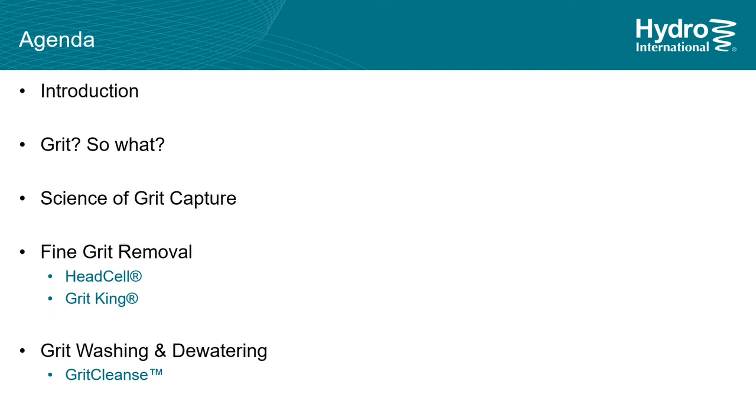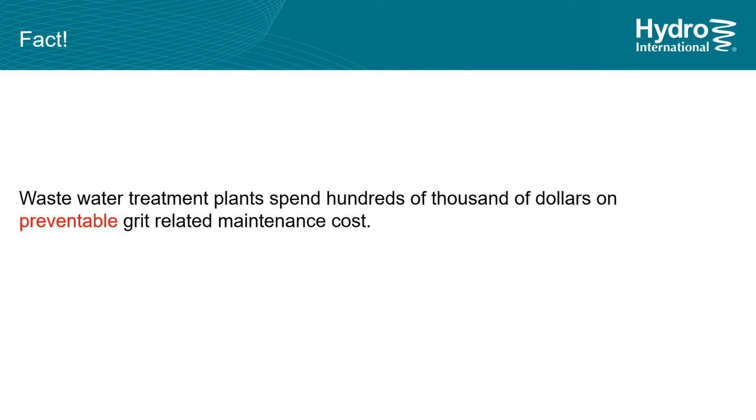Did you know that wastewater treatment plants spend hundreds of thousands of dollars on preventable grit-related maintenance costs? Preventable is the operative word here, which means that grit removal, when applied correctly, can help you save hundreds of thousands of dollars.

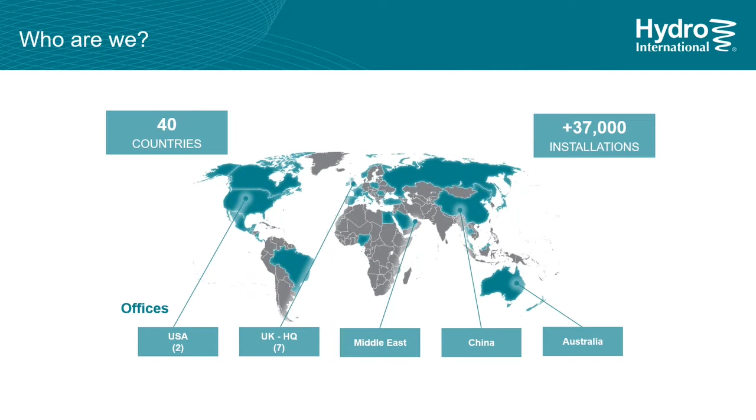Hydro International is a solutions provider for a variety of water and wastewater applications. We are headquartered in the UK with offices in the US, Middle East, China, and Australia. We have a network of distributors and partners all around the world that help us reach customers in over 40 countries. We have over 37,000 installations worldwide, and we have been in operation since the 1970s.

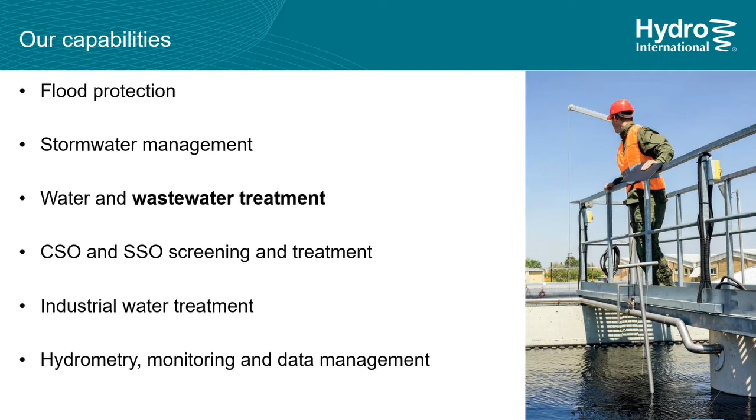As a company, we operate in various sectors, but today we will focus on grit removal from municipal wastewater. Hydro International is the market leader and pioneer of many grit removal technologies since the 1970s. We offer proven technologies and have featured in academic literature like Wastewater Engineering by Metcalf and Eddy.

We have also worked with universities around the world by performing in-field testing and proving the efficacy of our solutions. We have our own test labs in the US and UK in which we test and verify our research during product development.

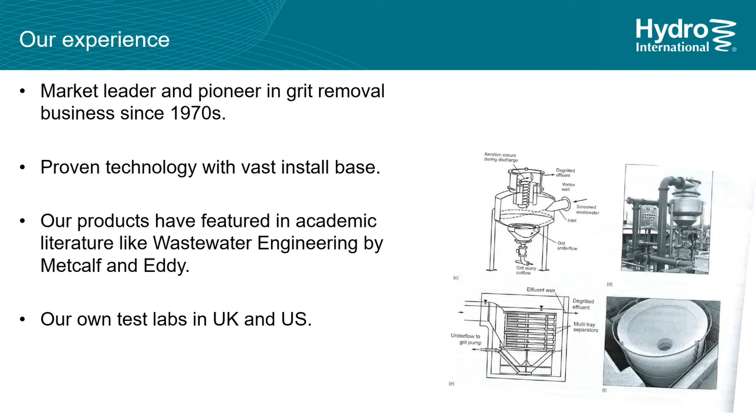Let's talk about grit and why it is a problem. Well, grit is a nuisance material. Anyone who has been to the beach can attest to that, right? And it is no different for wastewater treatment plants. It adds no value to any part of the treatment process. It is undesirable and it gets everywhere.

Literally everywhere. Wastewater treatment plants are significantly impacted by grit. It causes abrasive wear to mechanical equipment, increasing maintenance and operational costs. And it accumulates in processes throughout the plant, reducing processing capacity and efficiency over time. And once grit is spread around the plant, it is an expensive problem to fix.

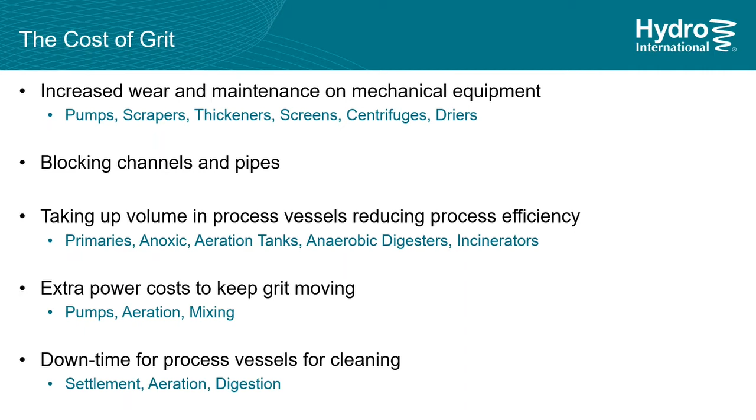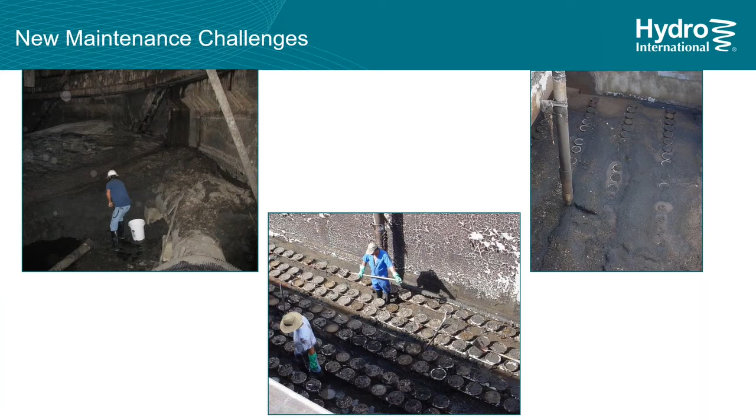Grit accumulation comes with several new maintenance challenges. You must take the process and vessel offline and send someone in there to clean it, often manually. This costs time and money.

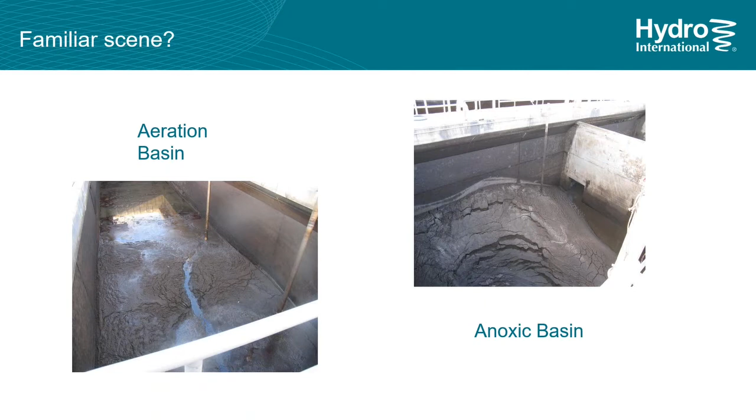It is important to note that all these pictures from different plants did have some form of grit removal system, and yet grit made its way into the plant.

Our research says that most operators have a grit problem, but they don't do anything about it. The assumption is that grit removal systems were installed, but the grit still made its way into the plant, so it is inevitable, there is nothing we can do about it. This is an incorrect assumption. The problem is preventable. We just need a system that works.

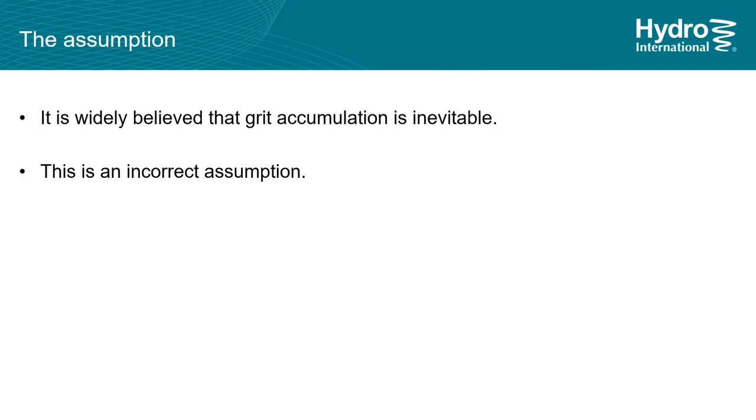The pictures that you just saw were a result of less than 50% removal of total grit that enters the plant. The solution is a system that removes the bulk of the total grit load.

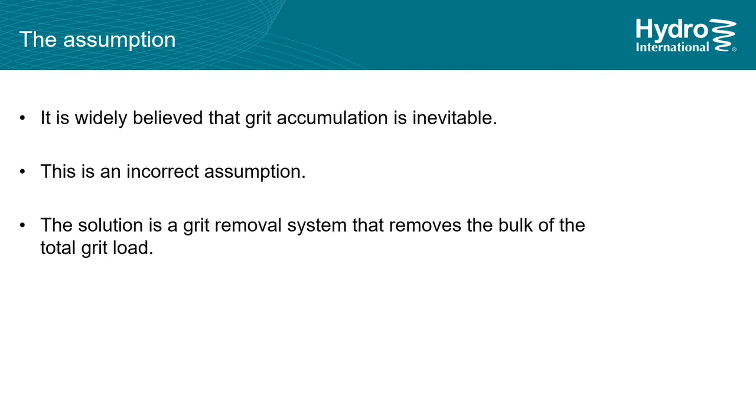We know that grit affects all areas of a treatment plant. Let's look at some figures.

In our research, we have estimated that potential maintenance costs due to grit is around $9.2 per 1,000 cubic meters of wastewater. Now granted, in your specific market, it may cost less to clean an aeration tank, but it might cost more to replace the pump. On average, this figure is representative.

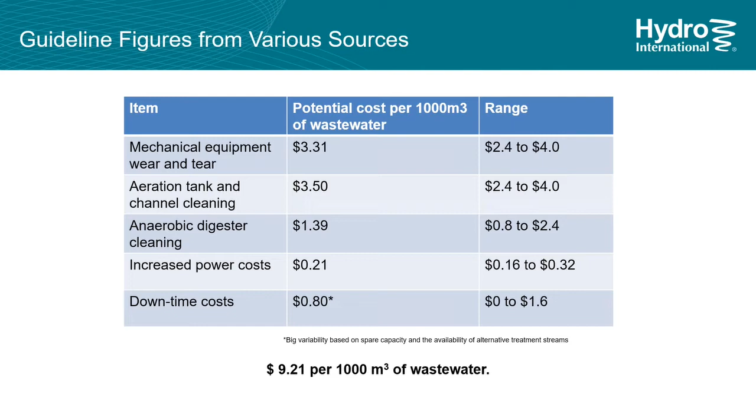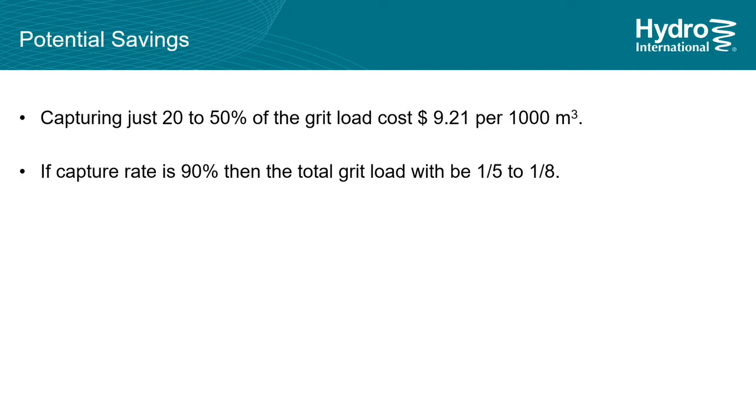That's $9.2 when we're targeting only 50% of the grit load. If we capture 90% of the total grit that's entering the plant, it will reduce the grit load to a fifth or an eighth, which will also reduce the grit impact cost to $1.8 as compared to $9.2. This might just save you up to $8 per 1,000 cubic meters of water. Clearly, there is an advantage in removing more grit at headworks.

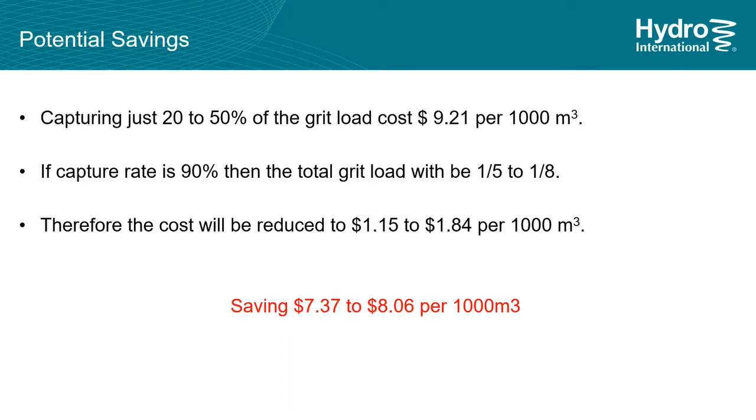Let's look at an example. We've collected this cost data from conferences, research papers, and from plant owners around the world. This is an insight as to how much money was spent fixing problems arising due to grit. We turn the cost into cost per volume of water treated by taking into account the average flows of various plants.

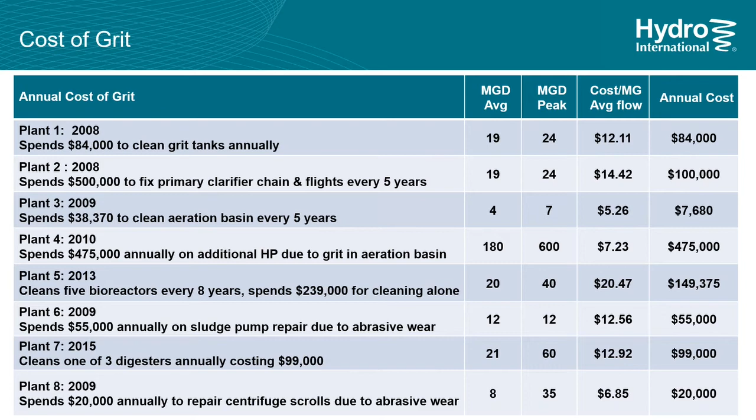As you can see from examples, plant number 2 paid $500,000 to clean up and fix their primaries. Plant number 5 spent close to $250,000 to clean bioreactors every 8 years. This is just a summary of areas that our analysis covers.

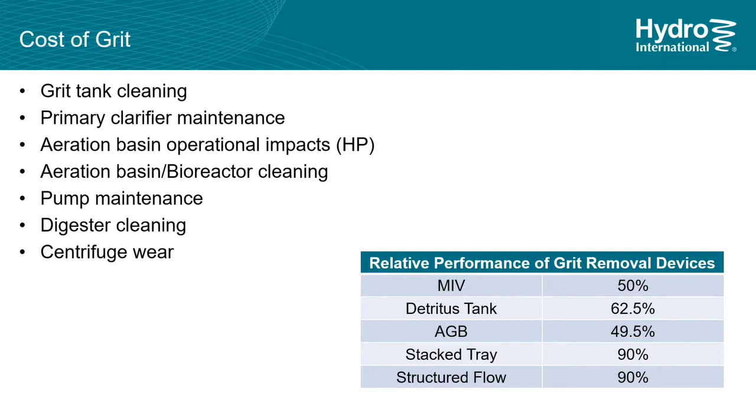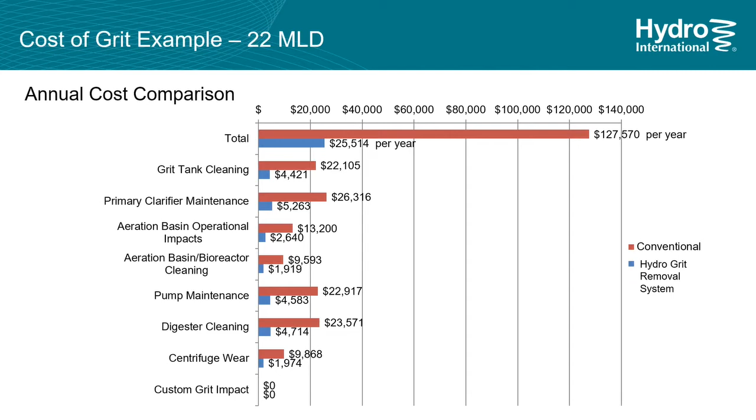We use the removal efficiency for the various technologies based on relative performance data. From that data, we created a total cost comparison for a 22 MLD plant. And also listed here is individual cost of grit for different areas in an STP.

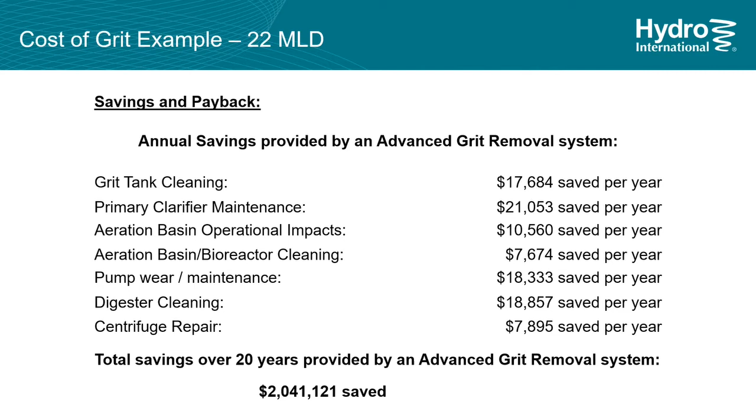If you take the difference, this slide shows that Hydro can potentially help you save over $100,000 per year in maintenance cost in a 22 MLD plant STP. It is important to mention here that it's not just the maintenance, but also operational costs that we help save. For example, our analysis shows that we can help save $10,000 per year in just energy consumption by reducing grit load on aeration basins.

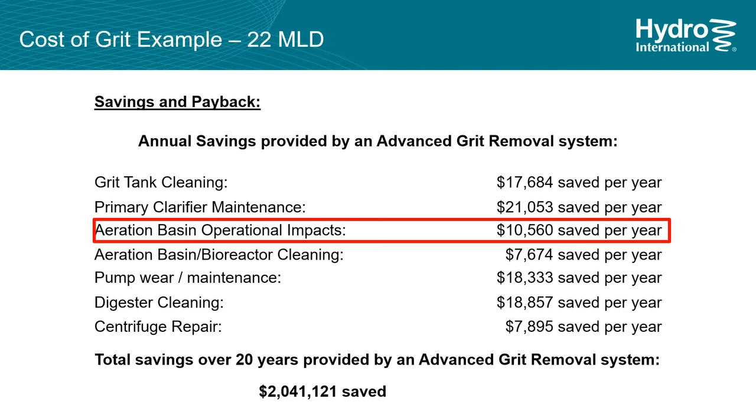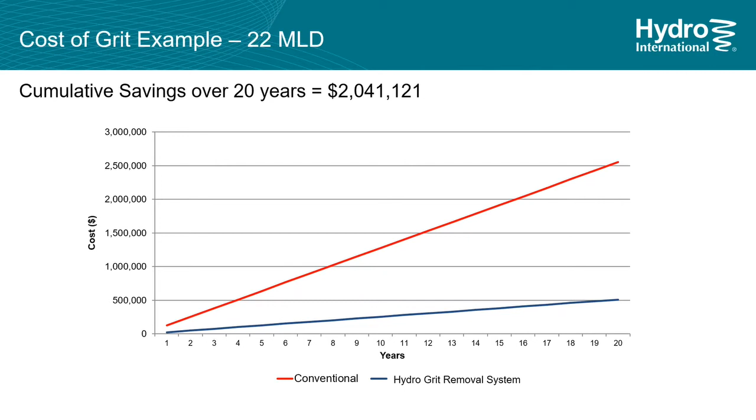In our estimates for a 22 MLD STP, Hydro can potentially help you save over $2 million over a 20-year period. And the savings in 5 years, which is equal to $512,000, could cover the cost of a new advanced grit system for a 22 MLD plant. In other words, the system pays for itself in 5 years.

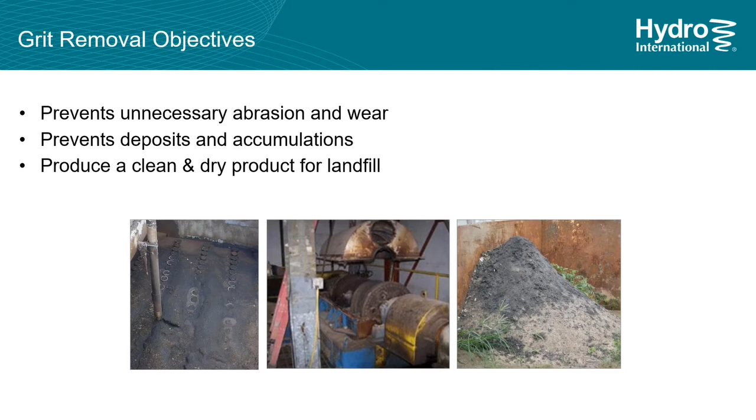So grit removal is important. Our objectives in removing grit are to prevent abrasive wear on mechanical equipment such as pumps and centrifuges. Preventing grit deposits in aeration basins, digesters, and piping is also another objective. All this would save significant sums of money.

Let's talk about why almost half of the total grit makes its way into the treatment plant and is not captured by conventional grit removal systems. All grit removal systems are sized based on settling velocity of grit. Settling velocity varies based on size, shape, density, etc.

A major reason that conventional grit removal systems do not work is a lack of understanding of how municipal grit actually behaves. Since grit is not well understood, it is often erroneously treated as clean sand particles. This is a major reason why most grit removal systems fail to capture the quantity and sizes of grit they are designed for. Understanding the actual characteristics of grit at a particular location helps determine the sizes and types of grit removal system that is needed to remove it.

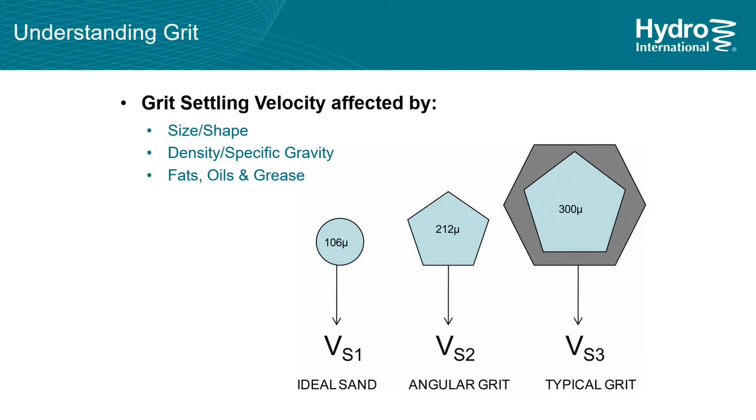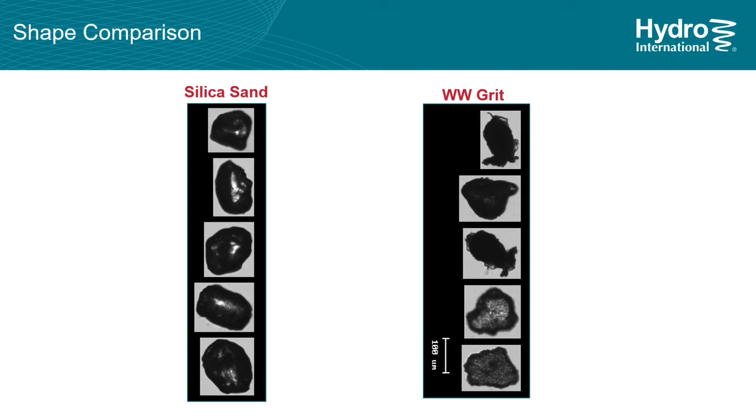Here are some magnified pictures of pure silica sand on the left and municipal grit at the right. As you can see, silica sand has well-defined geometry, whereas wastewater grit, wrapped in fats, oil, grease, and organics, has irregular shape. Therefore, it has irregular densities, and therefore, it would have different settling velocities compared to pure silica sand. The fact is that wastewater grit is very different to an ideal silica sand.

An easy analogy would be that of falling rain versus falling snow. Furthermore, most grit is smaller and lighter than the standard against which conventional equipment is designed.

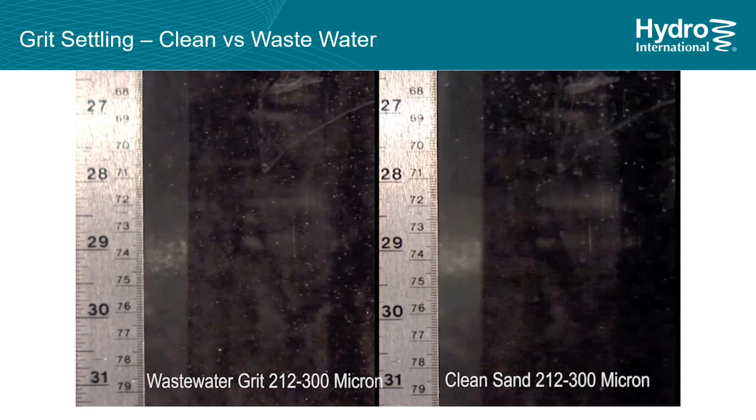As we saw, there are variations in types of grit. Municipal grit is not just a clean 200 micron spherical silica sand. Systems also have to deal with non-uniform particles, varying sizes, and addition of biomass. Variation in grit causes variation in settling velocities. With attached biomass, larger grit particles settle at slower rates.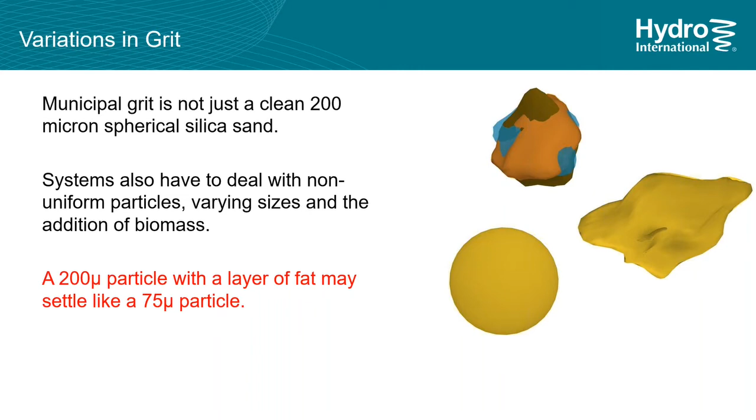A 200 micron particle with a layer of fat may settle like a 75 micron particle. So if a system is sized for a 200 micron clean grit, it might not even capture a 200 micron municipal grit, at least not the bulk of it. Another problem when sizing to remove 200 micron grit is that sometimes that is not enough.

This is a compiled particle size distribution curve of the grit from 18 different plants in the US. In almost all of them, you will find that sizing to remove 200 micron grit particles will only remove 50% of the total grit load.

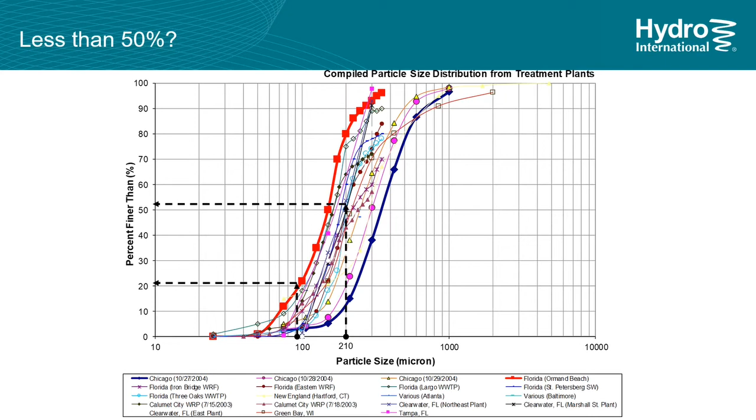If we modify our design criteria to remove 90% of the total of the incoming grit, then we need to change our design cut point to somewhere between 70 to 150 micron, depending on the endemic grit gradation.

This is the grit distribution curve of a grit that was found in the aeration tanks in a plant in the US. This was downstream of a mechanically induced vortex grit removal system, and this still had a lot of grit. Almost 45% was 300 micron, which that technology said it would remove 95% of. Obviously, that did not happen.

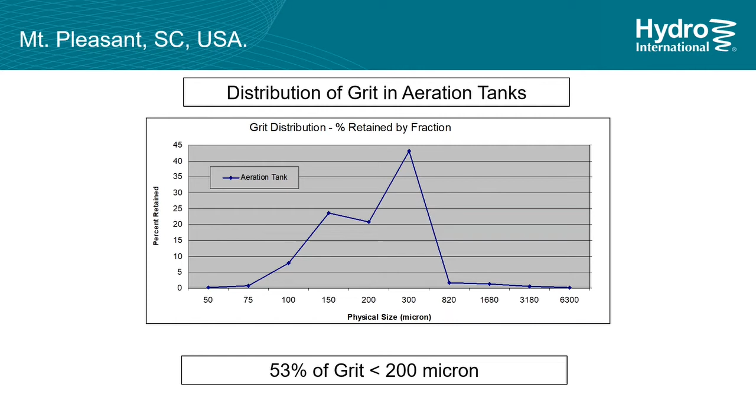You can also see that there were a lot of fine grit. Almost 53% of grit was less than 200 micron. Because grit is affected by size, the shape, the specific gravity, and then also what it is exposed to in the collection system, like fats, oils, and grease, dissolved gases, all sorts of material, then can attach to the grit particle and impact the settling velocity.

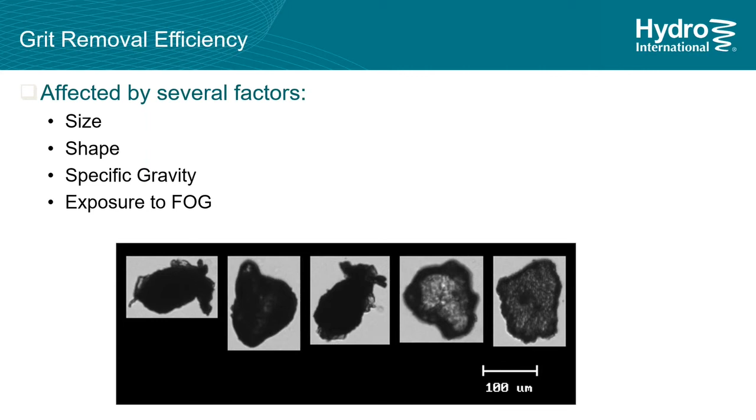Very few materials that we would expect to make up our grit load are 2.65 specific gravity. These are specific gravities of various materials that very likely are part of your grit makeup. Actual plant data from a couple of STPs show grit specific gravity of 1.3 to 1.5. And these plants found that larger grit particles were very flat shaped and they settled the slowest.

And that's important because it takes a 100 micron silica sand particle of 2.6 specific gravity 38 seconds to settle, whereas it takes a particle that has 1.35 specific gravity almost 4 times longer to settle. So it is important to understand your grit.

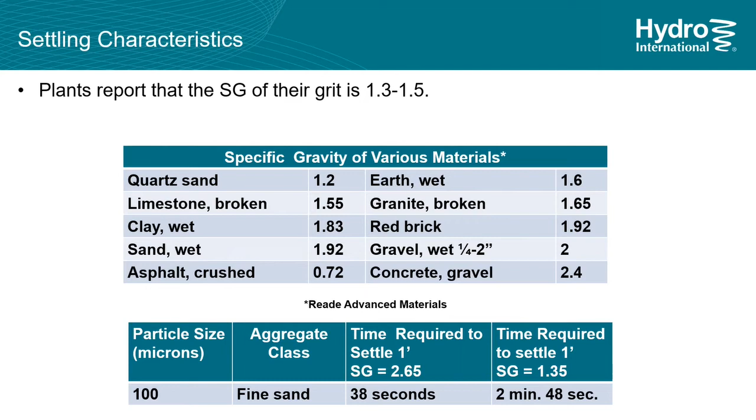Once you understand your settling velocities, you can assign what's known as sand equivalent sizing. If a clean sand particle settles quickly, represented by the long arrow, but the same size municipal grit particle settles more slowly, we can normalize the grit settling velocity based on a known quantity of spherical silica sand. We can say that this smaller sand particle settles at the same velocity as the larger municipal grit particle, and then we design to remove the smaller clean sand particles, which removes the more slowly settling grit particle.

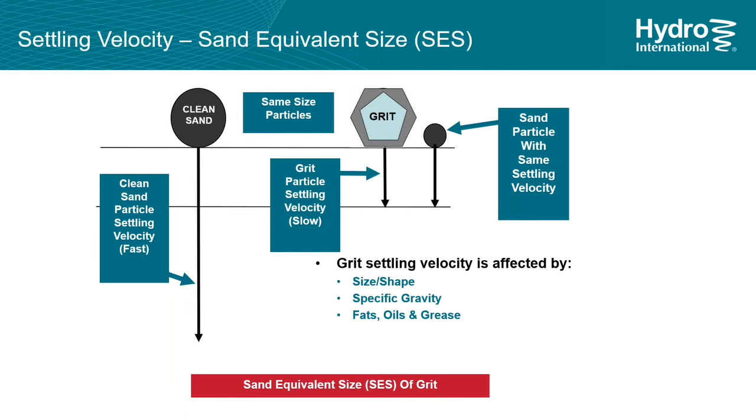SES, or sand equivalent sizing, is now referenced in Metcalf and Eddy as well.

So where is all this grit coming from? Grit remains in the collection system until it is transported to the plant. Low flow moves only small and light grit. Increased flow suspends the grit. First flush or peak flow significantly increases the grit load. Effective grit removal systems must function at peak flow and peak grit load simultaneously, and must not short circuit the flow.

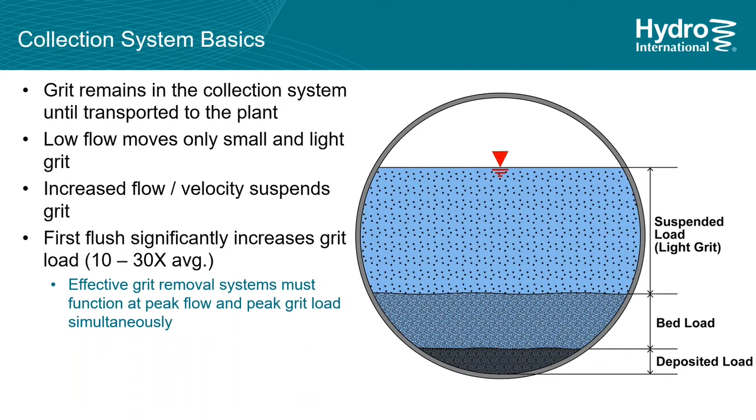This is why conventional design wisdom doesn't work. It targets much larger particles than it should to effectively capture the grit that is covered in fats and organics, and it does not take into account the effects of peak loads, the shape, the size, or specific gravity.

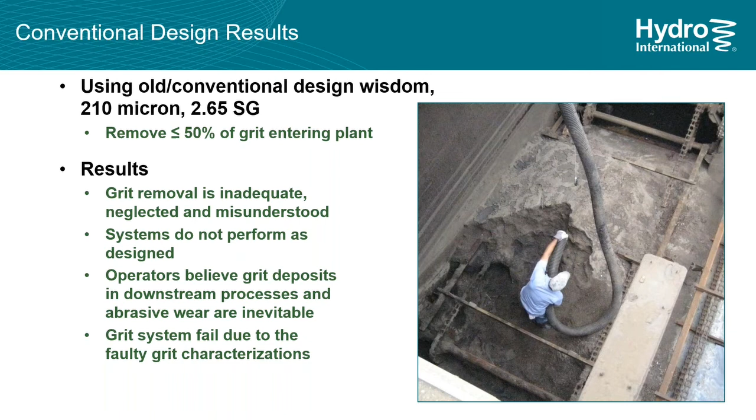So less than 50% capture of settleable grit is not good enough. Our conventional design criteria has been to target the big grit, 210 microns and larger, with a specific gravity of 2.65. Historically we focus on larger grit so that we would not retain organics, which create odors, increase volume and water content, and can make the product unacceptable at a landfill.

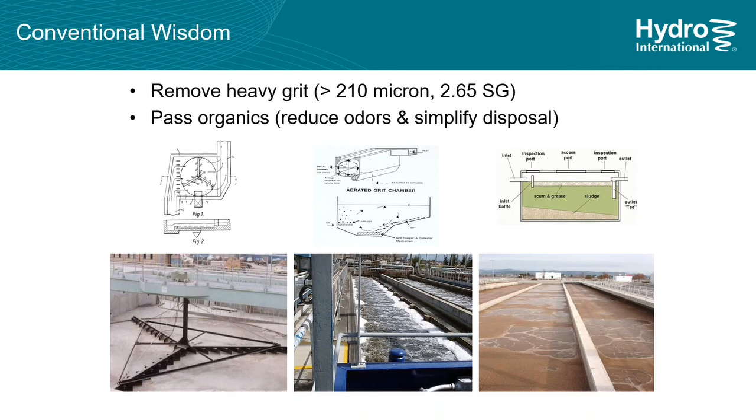We as an industry have never taken much more than a cursory view of our grit removal design criteria or characteristics of the grit entering wastewater treatment plants.

As we move towards higher performing processes, effective grit removal will become a more important criteria in our treatment plant designs. One certainly does not want grit entering an MBR plant where it can abrade the very expensive membranes. We've already seen that in one of our projects, where the owner refused to allow any product that does not guarantee fine grit removal, as they had sensitive membranes downstream.

Centrifuges operate at high speeds, which accelerates abrasive wear. Even as we upgrade from coarse bubble aeration to fine bubble aeration, the potential for grit deposition increases as the scouring velocities in the basins are reduced.

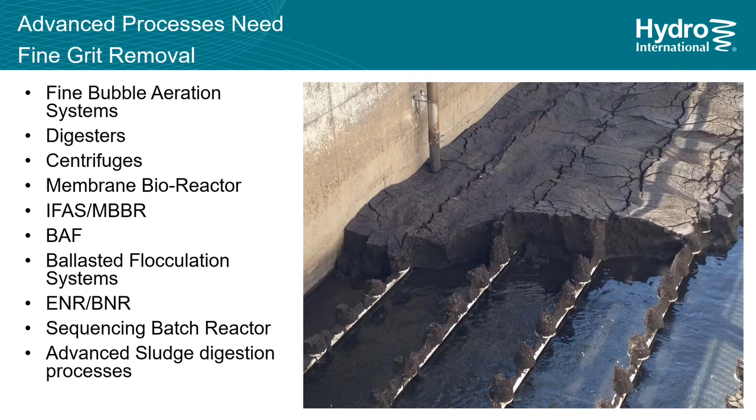Should this be considered routine maintenance then? Or should we be able to protect the plant from grit? We can manage it in the headworks where it's easy, or manage it in the rest of the plant.

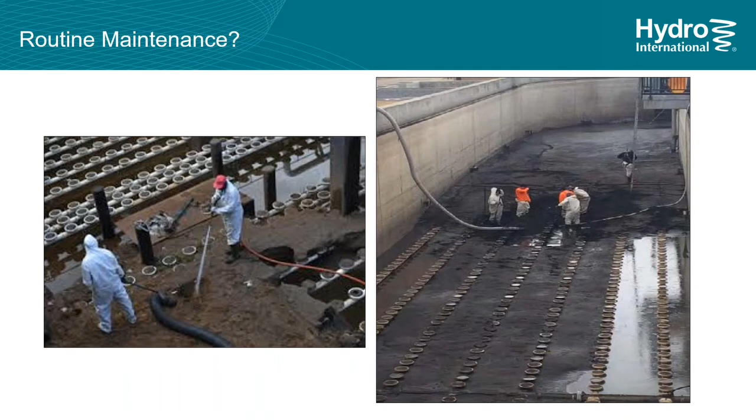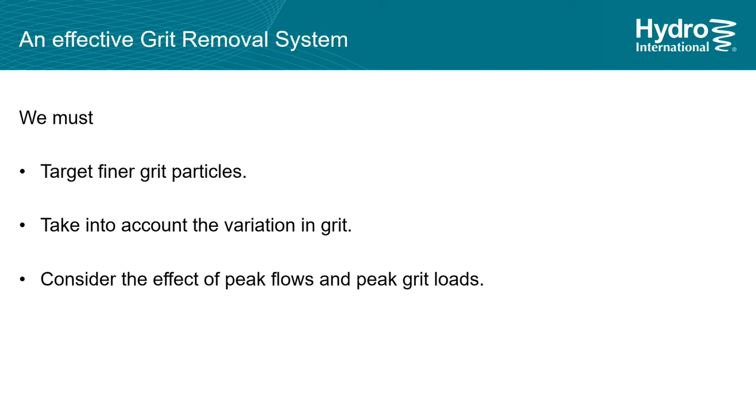For a grit removal system to be effective, it must target finer particles. It must take into account the variation in grit size, and it must be designed to suit peak flow and peak grit loads. And we can help you with that.

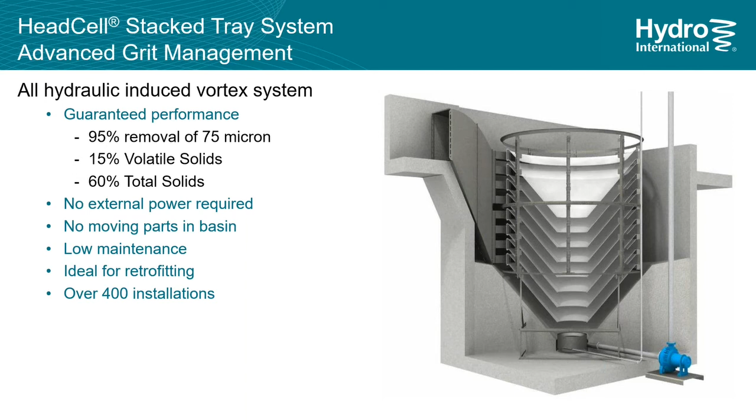The first solution I'll talk about today is HeadCell. HeadCell is a stacked tray grit removal system. It offers 95% removal efficiency down to 75 micron target particle size and larger. HeadCell is the only gravity sedimentation technology with such a guarantee. The device itself requires no external power. It has no moving parts, therefore has low maintenance requirements. It's ideal for retrofit applications, and we have over 400 installations as a reference.

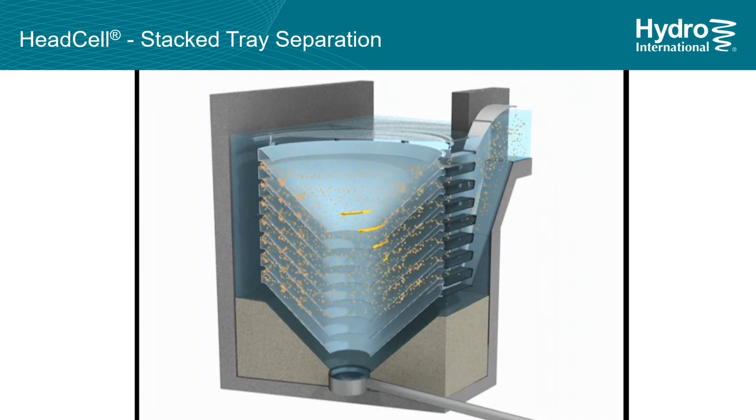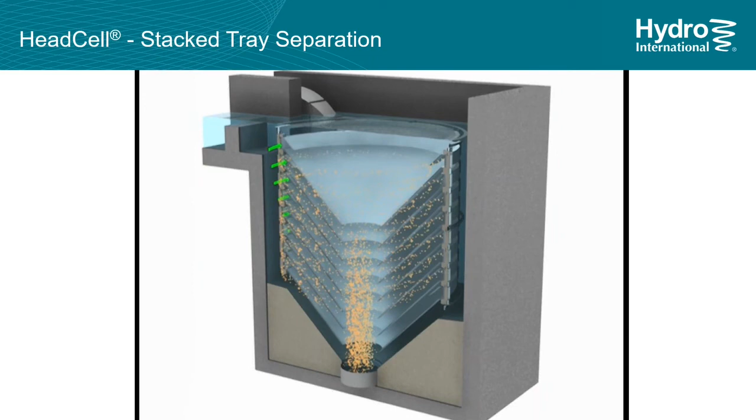This is an animation based on the CFD of the HeadCell. The manifold feeds inlet ducts that feed each individual tray. The flow is fed tangentially, creating a vortex. The tray lip keeps the grit on the tray and allows it to be captured in the boundary layer, which sweeps the grit to the center. The grit collected in this grit sump at the bottom of the unit is pumped to washing and dewatering. The degritted effluent is discharged between each individual tray into the surrounding basin and exits the basin over the weir.

HeadCell has a robust construction where trays are made of plastic and the support frame is made of 304 or 316 stainless steel. It is installed inside a concrete chamber, either above or below ground level, depending on site requirement and condition.

It has a high turndown range, which means it can handle fluctuations between peak and average flow rates. It is always sized for peak flow and grit load, so the grit removal performance is not compromised. It has a relatively low head loss of less than 305 millimeters at peak flows.

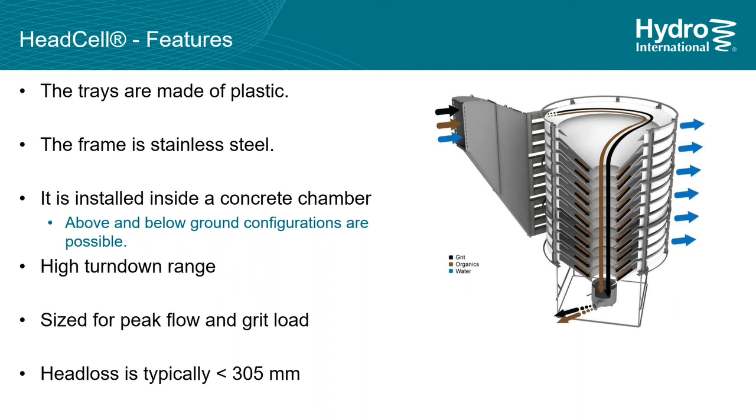HeadCell has a significantly smaller footprint compared to other technologies while delivering much better performance.

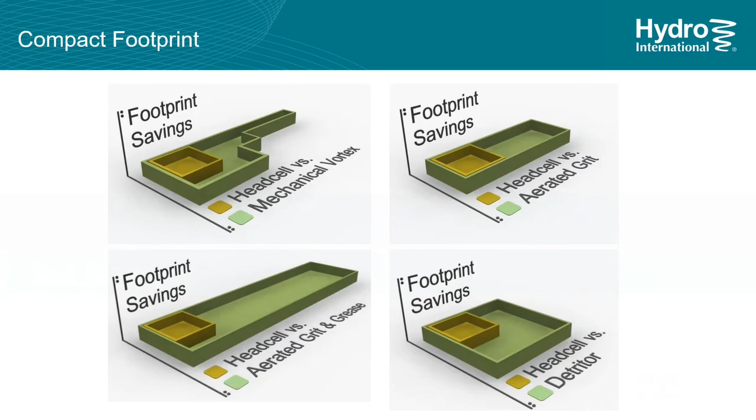Another product in our portfolio that has excellent fine grit removal performance is GritKing. GritKing can be sized to target 95% removal efficiencies for all grit down to 106 micron. The product has no moving parts and can handle wide ranges of flows.

The inflow and underflow can be gravity or pump flow. GritKing produces very low head loss, typically less than 150 millimeters at peak flow. Due to absence of any moving parts, the device is very simple to operate and maintain.

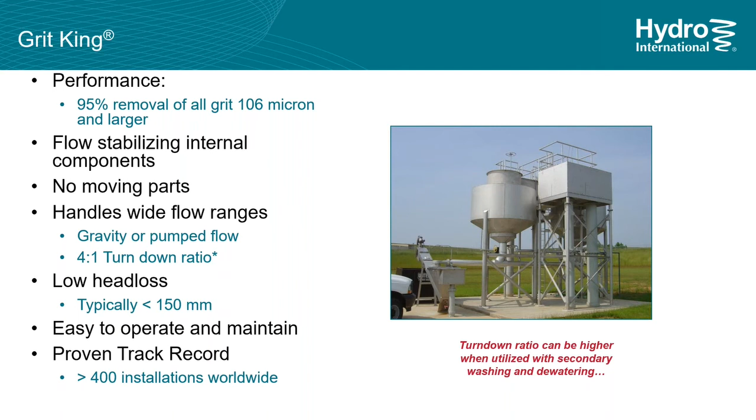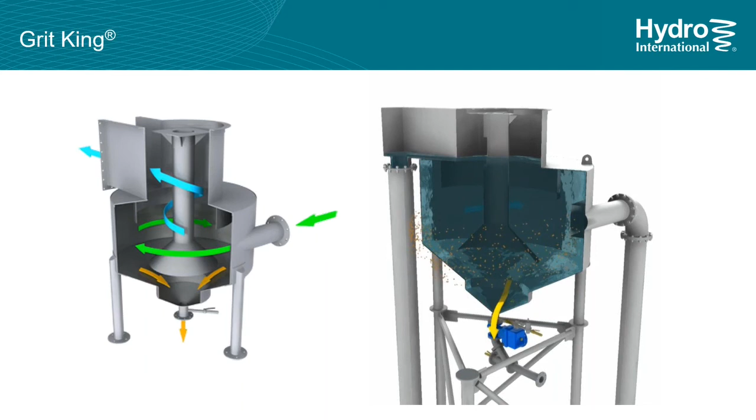The flow enters tangentially into the unit where it is directed in a circular path. This allows the grit an elongated path to have more settling time. The grit is collected at the bottom in the sump from where it can be extracted by either gravity or pumped extraction. The second spiraling column takes the treated effluents towards the overflow channel.

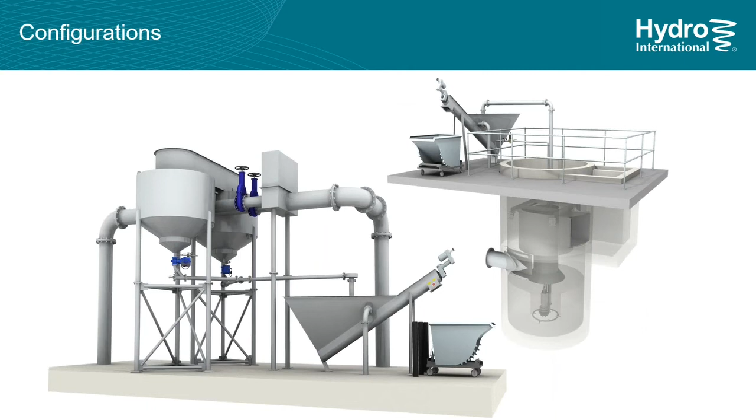The GritKing can be designed inside a concrete chamber or as a standalone vessel to suit the hydraulics of the plant. The image on the left illustrates a freestanding configuration. The image on the right illustrates an in-situ GritKing arrangement which features a submersible pump for further flexibility within a concrete chamber. This flexibility and ease of installation makes Hydro solutions simple to design into your works.

The GritKing too is substantially smaller than its rivals, with typical land requirement less than 50% of those required for other solutions. The layout and handling of the process can also be tailored to the site, as there are no requirements for long straight inlet channels in set orientations.

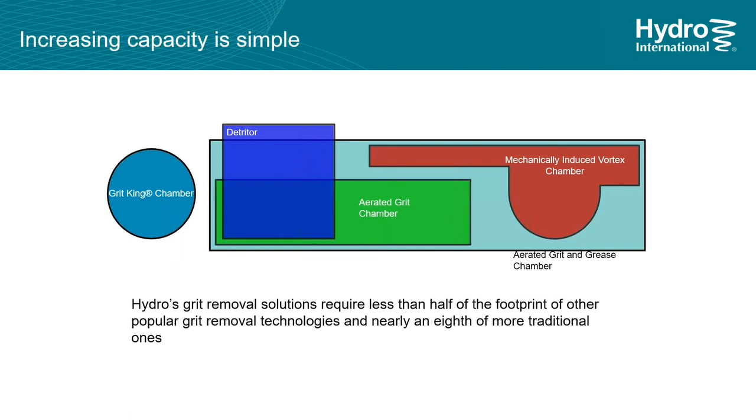Let's compare the conventional technologies with Hydro's grit removal systems. The source of the removal efficiency data for other technologies is taken from an independent research paper. The detritus tank did a good job by removing 57 to 68% of all grit, 106 microns and larger, but it was running only at 66% of design flow.

The aerated grit basin, when it was running at 66% design capacity, also had good removal of around 67%. But when it received flow at 100% of the design capacity, the removal efficiency dropped to 32%. That is not going to protect the plant when you're having peak flows.

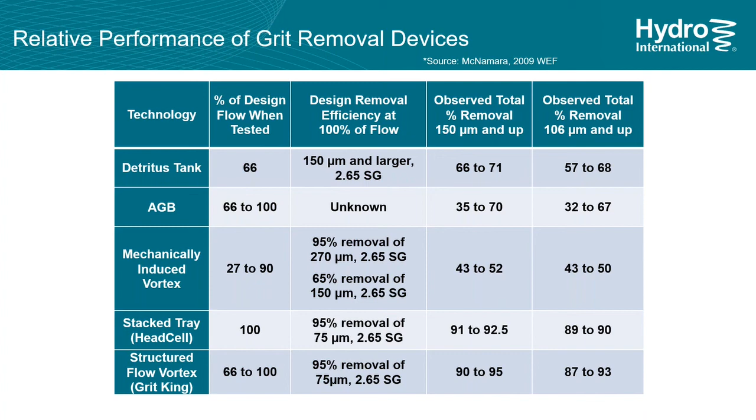Mechanically induced vortex or impeller-driven systems at 27 to 90% design flow generally showed around 50% removal of 106 microns or larger. Both our units, the HeadCell and the Grit King, at 100% of the design flow showed between 87 to 93% removal efficiencies. These claims have been proven many times, and we'll be happy to share more details about our performance.

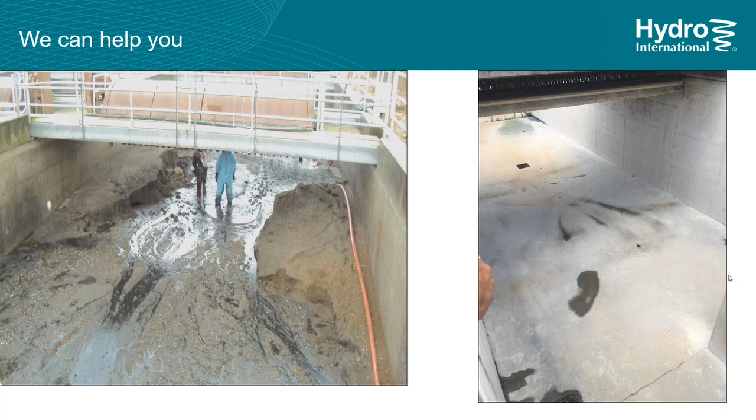We've talked about the grit collection step and the importance of targeting fine and light grit in order to more effectively remove grit and minimize deposits. We have targeted fine and light grit material. We will also retain more organics. So we need to look closely at washing and dewatering and do these steps as well as the grit collection system.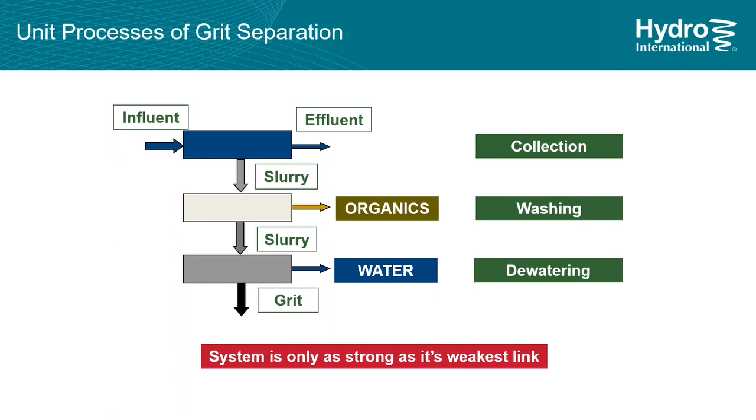Finally, I'll talk about the grit washing and dewatering system called Hydro GritCleanse. Hydro GritCleanse is a fluidized bed grit washing system that significantly reduces volatile solid content to produce cleaner, drier wastewater grit, reducing volume, weight, and water content to reduce odor issues and reduce landfill disposal cost. GritCleanse is designed to receive underflow grit slurry from GritKing or HeadCell to wash and dewater the grit.

It produces greater than 85% total solids and less than 5% volatile solids. Usually an intermittent operation is preferred, as it reduces energy usage and improves GritCleanse efficiency. The maximum solids handling capacity is 1.14 cubic meters per hour.

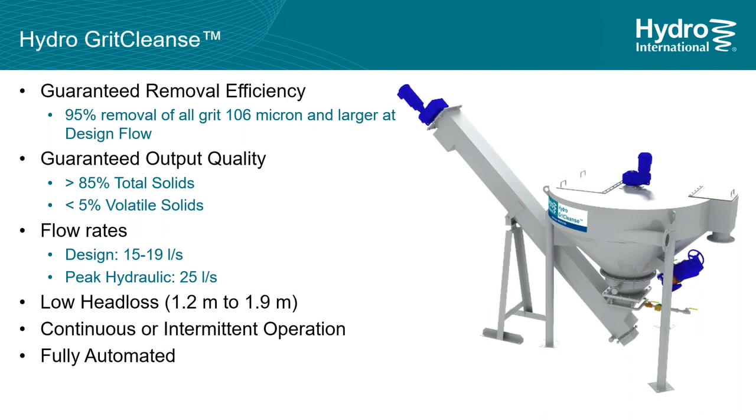To summarize, I would say that an effective grit removal system can save wastewater treatment plants significant sums of money. I hope this presentation was useful to you.